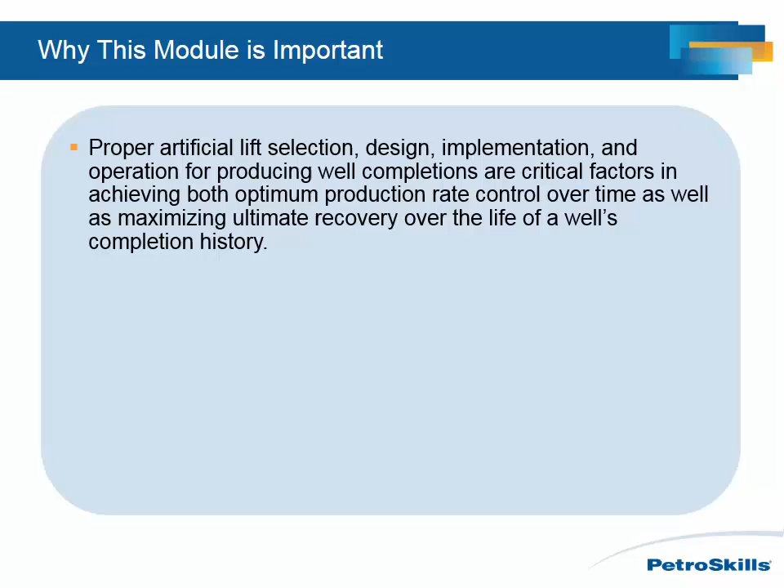Proper artificial lift selection, design, implementation, and operation for producing well completions are critical factors in achieving both optimum production rate control over time as well as maximizing ultimate recovery over the life of a well's completion history.

Rod pumps dominate the oil field with regard to the total number of units operating worldwide for very specific reasons. Once properly engineered and installed, and with proper well surveillance, rod pumps have proven their durability and competitive and technical superiority over time for an appropriate set of well conditions.

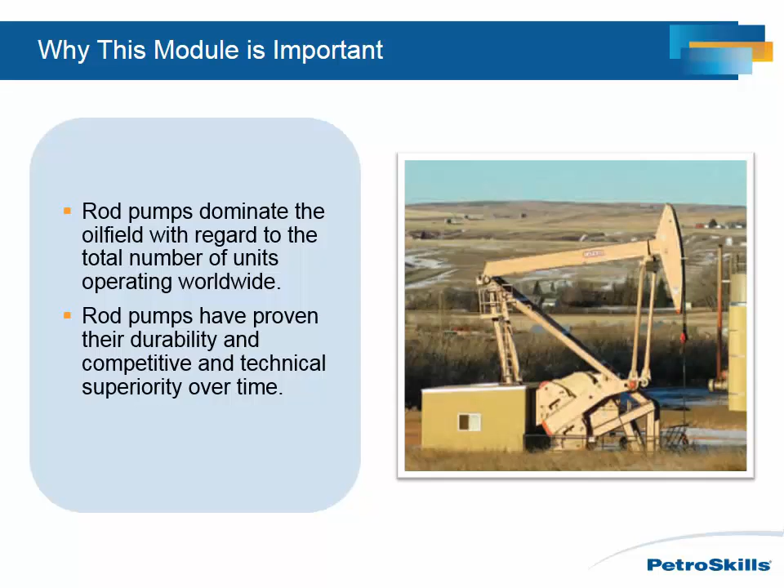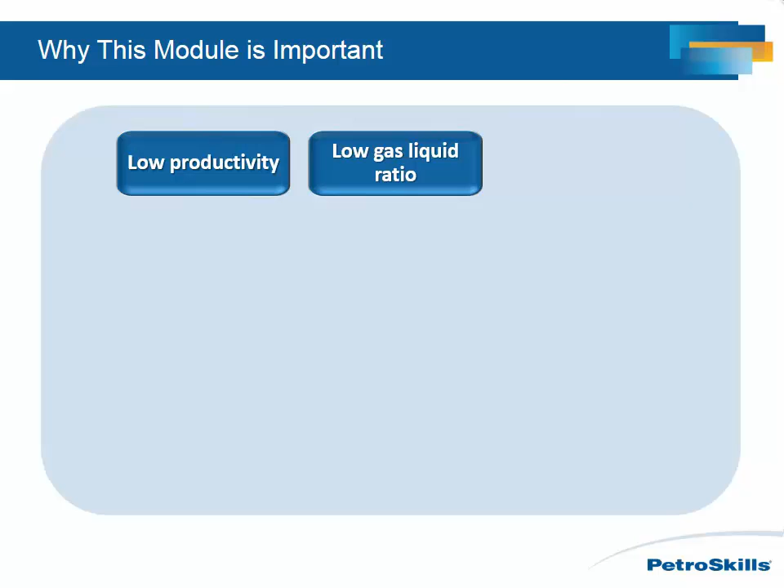The ability to design and operate commercially attractive artificially lifted well completions for conditions such as low-energy reservoirs characterized by low productivity, low gas-liquid ratio, high viscosity fluid production, significant water cut, some sand production, some paraffin wax present, with corrosive conditions mitigated by metallurgical and chemical treatment programs.

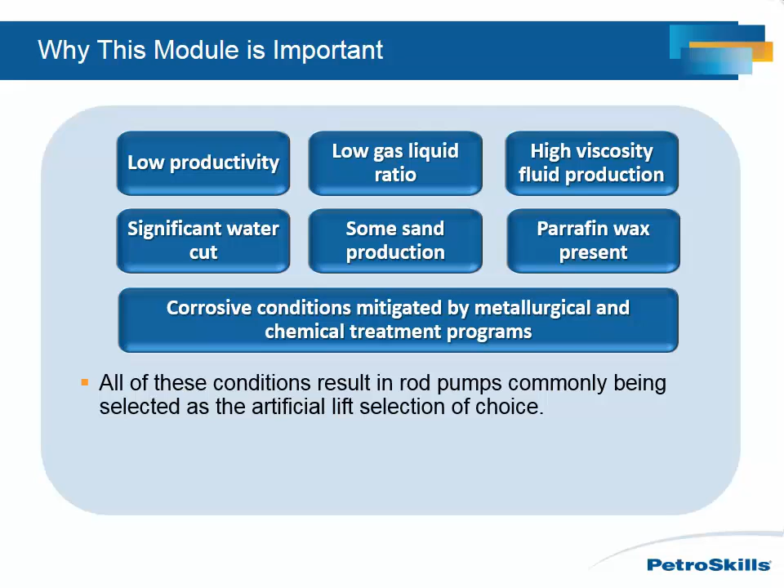All of these conditions result in rod pumps commonly being selected as the artificial lift selection of choice, and the above conditions described have a much broader scope of why rod pumps may be the best choice of artificial lift completion for all or just certain wells in a field.

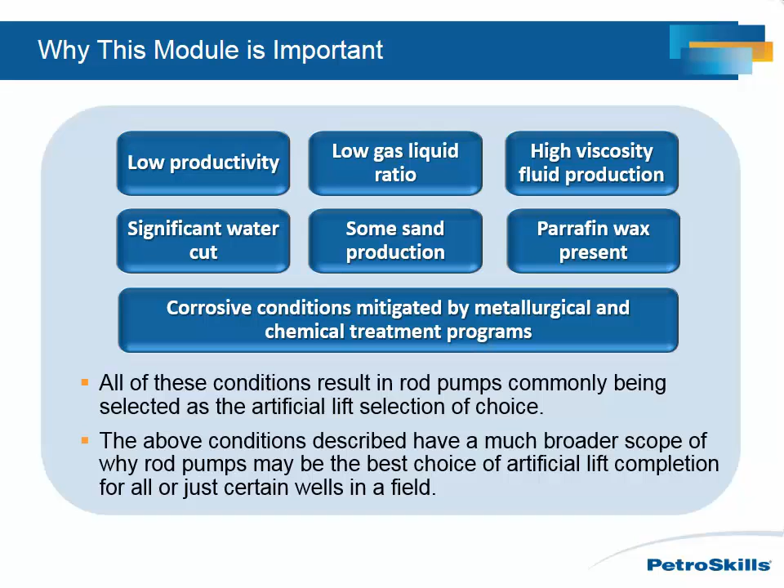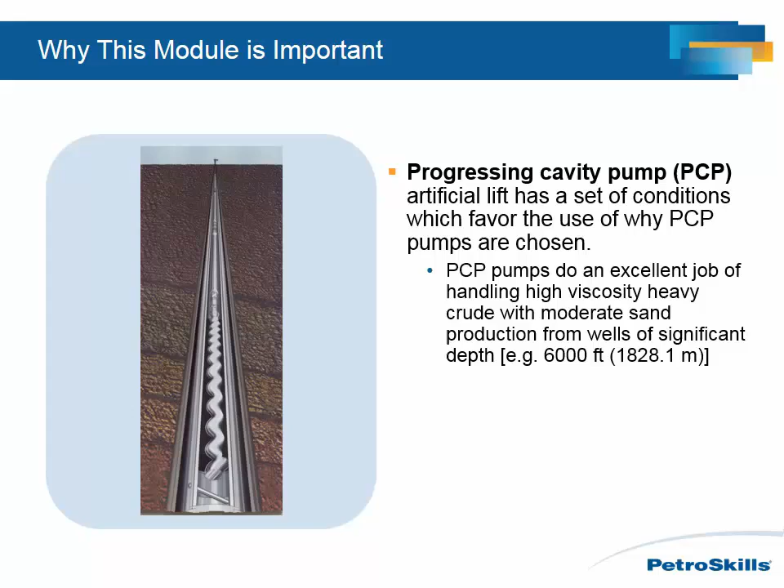Similarly, progressing cavity pump (PCP) artificial lift has a set of conditions which favor the use of PCP pumps. For example, PCP pumps do an excellent job of handling high viscosity heavy crude with moderate sand production from wells of significant depth, such as 6,000 feet, 1,828.1 meters. Canadian heavy oil production operators rely upon PCP technology in high-temperature thermal recovery operations that PCP pump systems support.

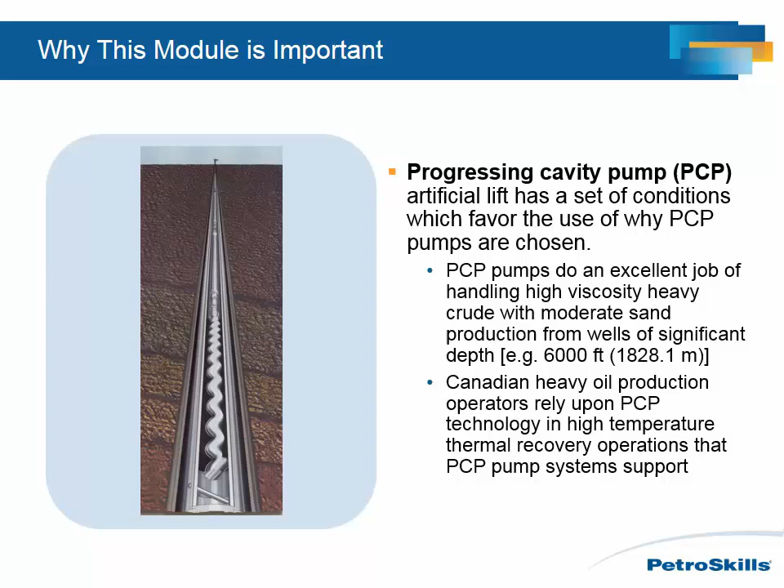Jet pump completions are a unique artificial lift application. Jet pumps are often considered to be the most versatile artificial lift type. This fact alone would seem to indicate that prolific use of jet pumps would be found throughout the oil field. Why such is not the case is due to the corresponding feature that they are by far also the costliest type of artificial lift application, and they are often challenging to operate.

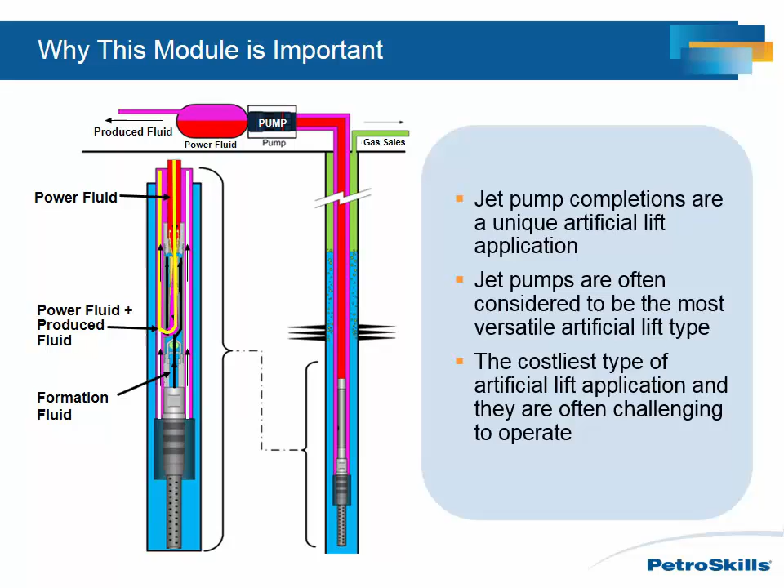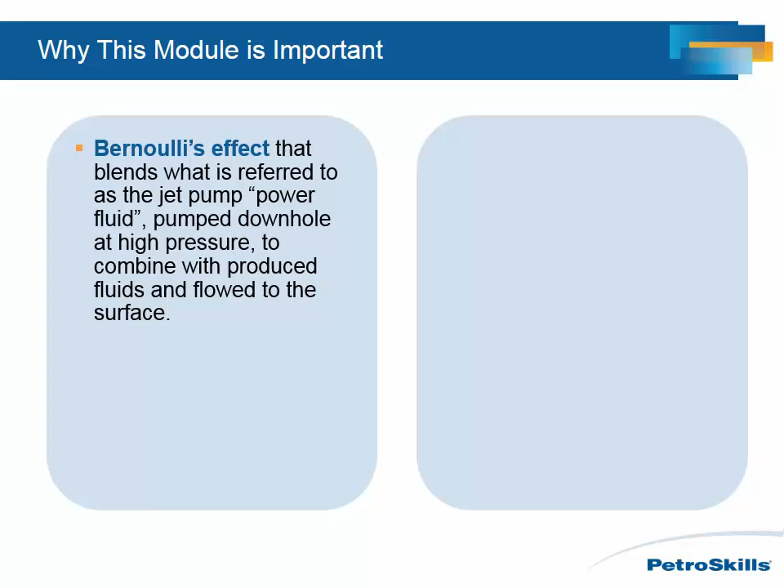The downhole component of the jet pump system creates a Bernoulli effect that blends what is referred to as the jet pump power fluid, pumped downhole at high pressure, to combine with produced fluids and flowed to the surface. What follows at the surface is a separation process to separate produced oil and water from the power fluid. Jet pump technology and its attributes, high pressure operation, continuous fluids separation, power fluid selection, etc., also present an environmental and safety concern.

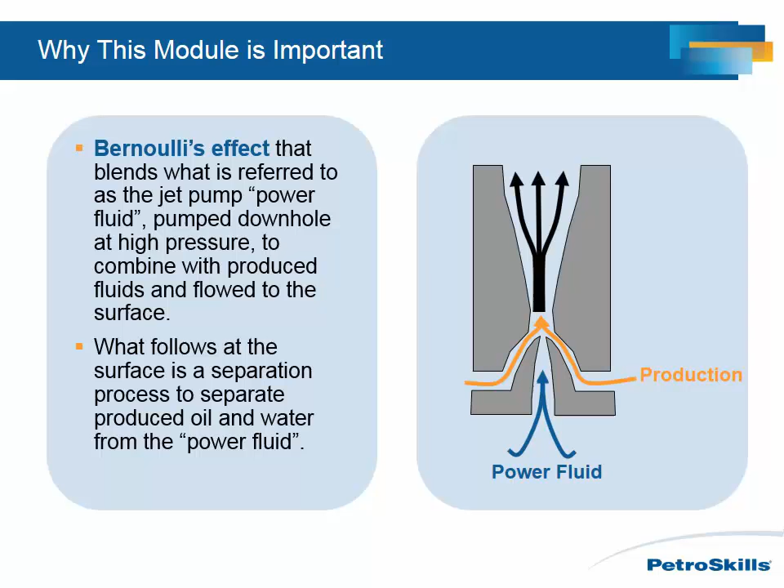The most common answer why plunger lift artificial lift technology is applied in the field is that once properly designed and installed for wells meeting strict candidate selection scrutiny, it permits the recovery of gas reservoir remaining reserves down to reservoir depletion pressure, and properly operating plunger lift systems operate at very low cost levels.

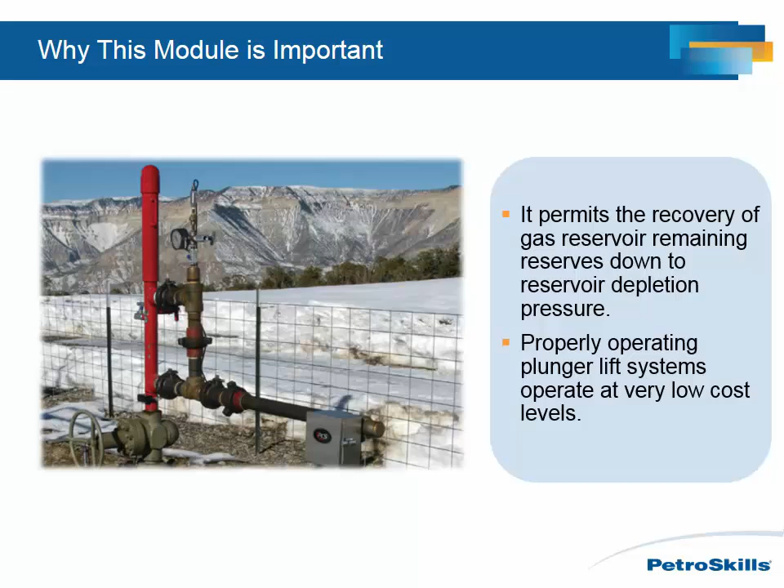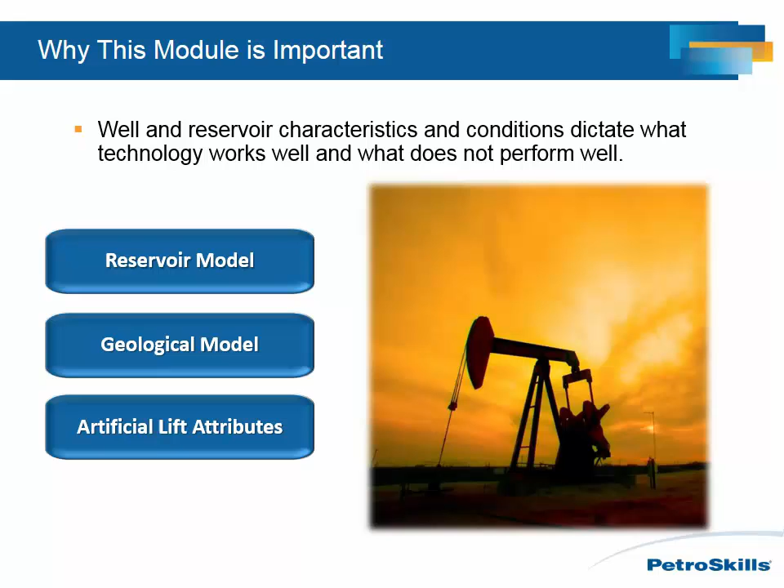In summary, why specific artificial lift technologies are applied and others excluded for wells across a wide range of conditions is due simply to the fact that well and reservoir characteristics and conditions dictate what technology works well and what does not perform well. This fact does make the selection process to arrive at the most appropriate artificial lift type a matter of thoroughly understanding the reservoir model, the geological model, and artificial lift attributes that address the unique characteristics of all oil and gas assets requiring artificial lift assist.